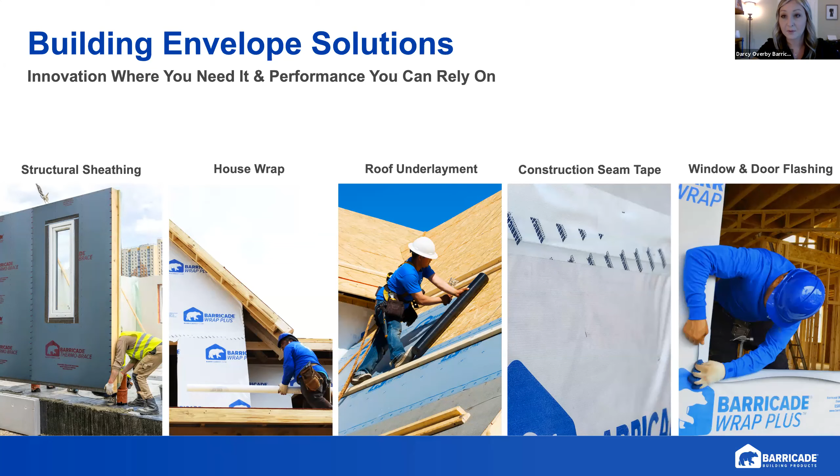So we've got a wide variety of different products that we manufacture. We've got three different structural sheathing options, 4 different house wrap options, a couple roof underlayments, our seam tape, as well as window and door flashing options. So we'll go through first - this is kind of a hot topic right now with the panels market, the OSB market, where it's at today. So we'll start talking about our structural sheathings.

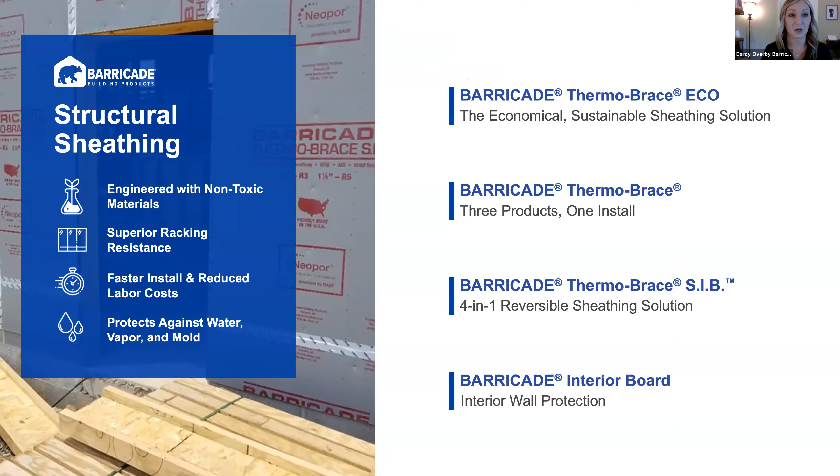So the first product we have here is our ThermoBrace Eco line. This is our structural sheathing option. It is a recycled product. All of the competitive lightweight sheathings on the market are also going to be recycled products. So it's a 3-in-1 product. You've got a structural component, so it takes the place of your OSB and house wrap.

It is a direct substitute for OSB, so it is your structural component. It is coated on both sides with a poly coating, so it takes the place of your house wrap as well. And it is your air barrier. So it is a 3-in-1 product here.

In addition to that, the nail lines are printed on the product, so there's no guesswork as far as where the fastener goes. On the picture there, you can see the different hash lines there. And it's a 16-inch on center panel, made for 16-inch on center, so the hash lines are down the middle as well, so you don't have to guess where the stud is.

We make this in 3 different grades, so green, red, and blue. The main differences here are the green is the thinnest of all the products, and the blue is going to be the thicker of all the products. They have different shear values as well, just because of their thicknesses.

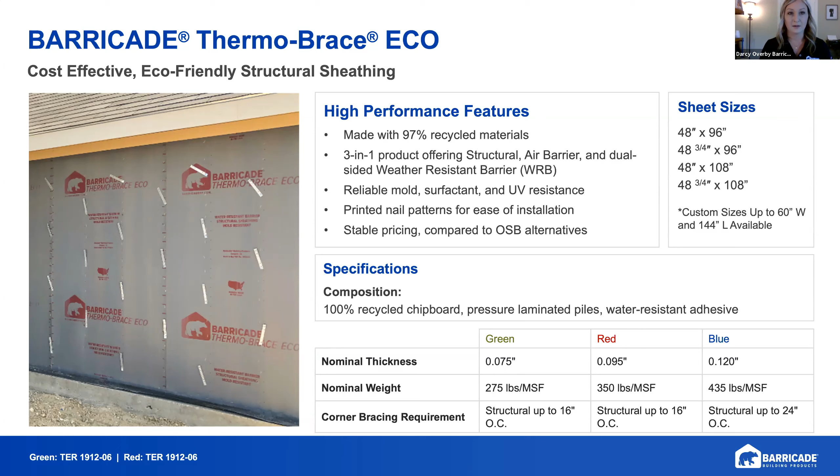Okay, so in comparison to our ThermoBrace Eco, we also make a ThermoBrace. So they serve the exact same purposes, these 2 panels. However, our ThermoBrace is different in that it is not a recycled product. So this is made with virgin kraft fiber material. It allows the product to be a little bit stronger. So you'll end up with higher shear values on all the different grades, green, red, and blue.

So this by far is the strongest lightweight sheathing on the market in comparison to our competitors and in comparison to our ThermoBrace Eco product. If you're going to start taking a look at different alternatives to OSB or other sheathings, and you want to look at lightweight sheathing, this product here will be your strongest option.

Again, it is not following the OSB market, so the price is very stable on the product. We've had 1 price increase in 2-3 years, so it's very price stable. And I think a lot of you were asking yesterday, how does it compare price-wise to OSB? And right now, it's less than half the cost if you compare panel for panel. So it's getting the job done.

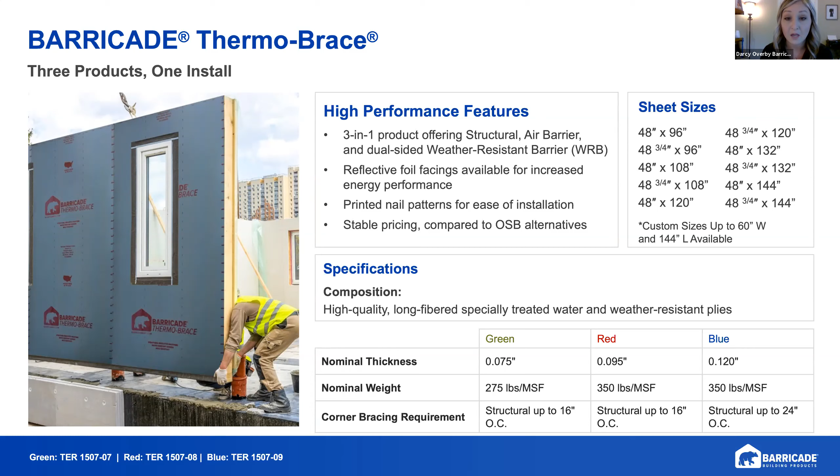So the other sheathing option we have is our ThermoBrace SIB board - a structural insulated board. This is the exact same thing as far as it's using our ThermoBrace structural panels, but we are adding a Neopor foam to one side, giving you an added R value. So you can now have a structural panel with an R3 or an R5 value to it, and your air barrier and your weather barrier all in one.

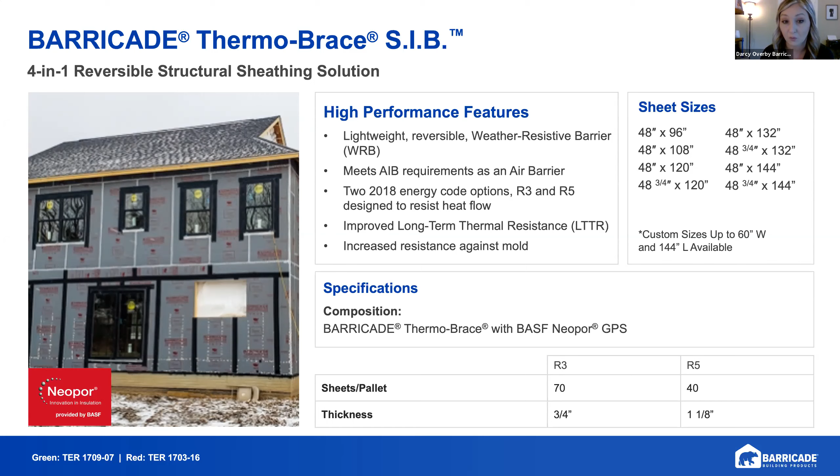The neat thing about this is that it is reversible. The other products on the market are not reversible products. Yeah, so obviously one of those advantages is the fact that it can be reversible. So you can go structural sheathing on the outside, similar to the very popular zip wall system. It would be the only two products that have the hardboard on the outside and the foam on the inside.

That leads to the ability to nail it, as opposed to if you go foam on the outside, you're using a crown staple, typically a 15/16 crown with a 1.25 leg, where you can use a standard nail gun and hit it with an 11 gauge roofing nail, with the hardboard on the outside. Taping the seams, or you can house wrap, either one - it doesn't matter, but it's a pretty clean install. Lightweight, easy to move. You're not having three guys offload lumber, you're having one guy grab a sheet, put it on the wall, and then continue on.

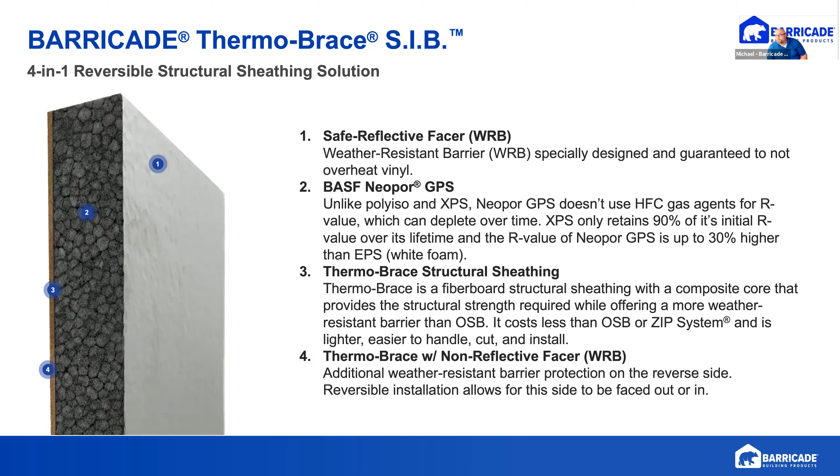Then the last item we have here, this is our interior board. Basically this is used for if you're doing anything on the interior side of the home on the stud. This has poly coating in between the plies here, so it helps reduce drywall cracking. It is gluable if you're doing anything that needs to be glued as far as the interior board.

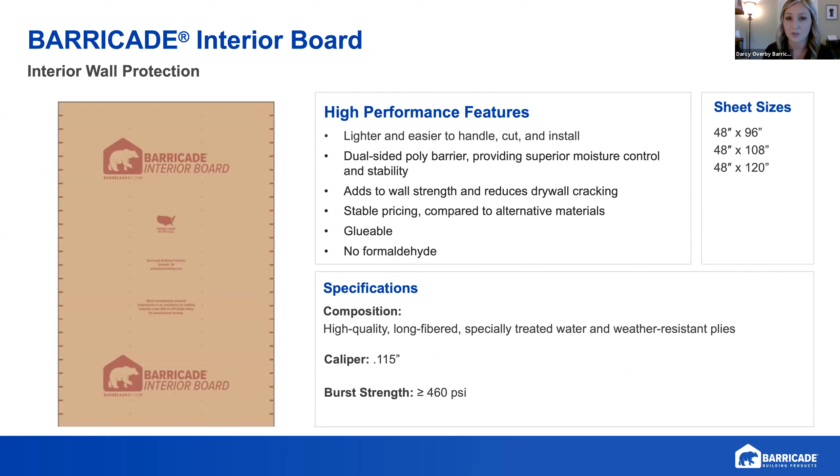So when you're talking about the different sheathing options that are available, and the lightweight sheathing is newer to the market, the first thing people start looking at is the cost and availability of the product. This product doesn't follow any commodity market, so when compared to OSB or CDX, we're very stable. You don't have to quarterly or bi-weekly worry about the product having dips or spikes at all - you can really plan around the cost of the product.

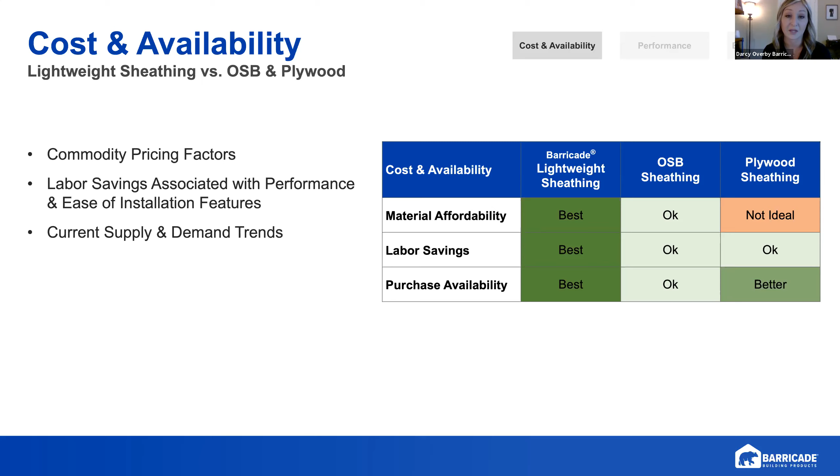As far as performance goes, really the big thing here is people get stuck on the thickness of the product. At most, it's 1/8 of an inch thick, that's right around how thick it is. Going from 7/16 OSB to 1/8 of an inch thick, people really have a concern. Really the fastening of the product is where a lot of our strength comes from. So like OSB, you will fasten 6 and 12 - 6 inches down the edges and every 12 inches in the center. Our product is 3 and 3, so you're fastening it a lot more often, which allows a lot more shear value.

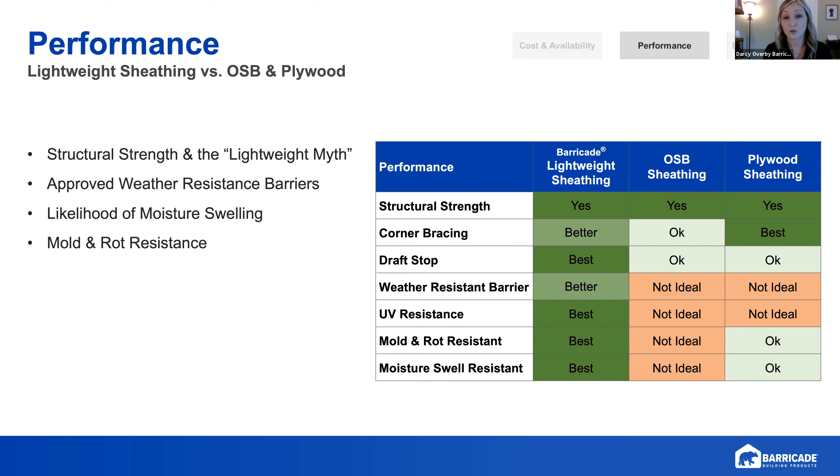And then ease of installation - how is it different to install than OSB? Are my guys going to know how? Those are some of the questions we get asked. And it's a direct OSB replacement, so you put it up just like you would OSB, but we've got the nail lines on there as well, so there's no second guessing where do my nails go - you're not going to miss it because it's all right on there. As far as fasteners, you can use your 1¼ coil roofing nail or a 1-inch 16 gauge staple with a 1¼ leg. So there's not a lot of differences between this and installing OSB.

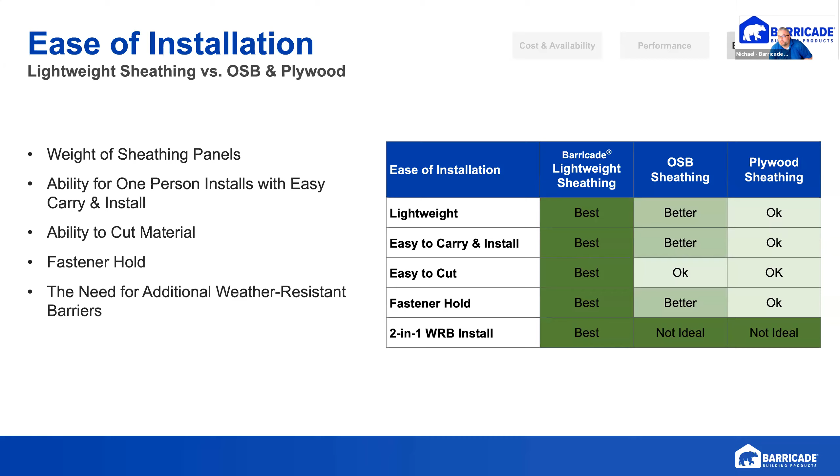Ease of installation spreads the whole way through, whether you're using siding or Hardie or anything like that. Your nail lines, so you're going to know where you hit the studs. That's a big advantage, especially if you want to have siding installed properly - hitting your studs is a big factor in that.

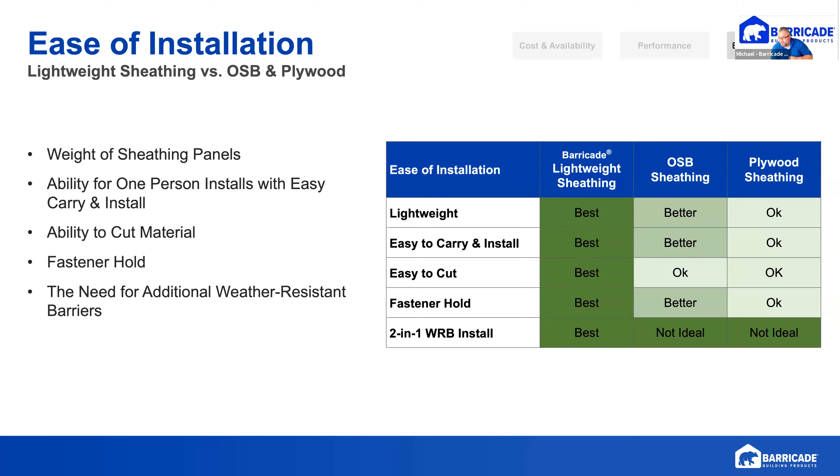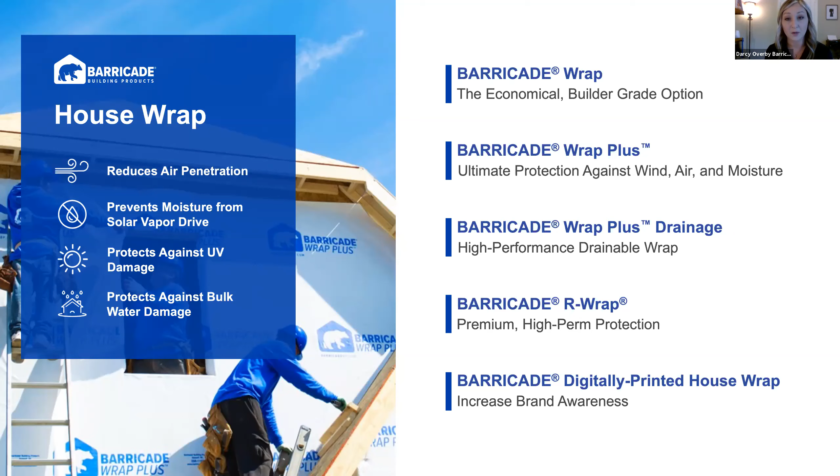So that was our few different sheathing options. We also manufacture a few different house wraps. We've got a builder grade, economical woven wrap, a couple of different options - we've got a high perm and a low perm option, and a drain wrap that we'll go through here.

So our first option is our builder grade option. This is going to be your woven perforated option. It is up to 12-month UV protected, and we can do multiple different sizes as you see there. This will be at 11 perms, and it is translucent, which is unique to us. So when you put it up, you can see through to the stud.

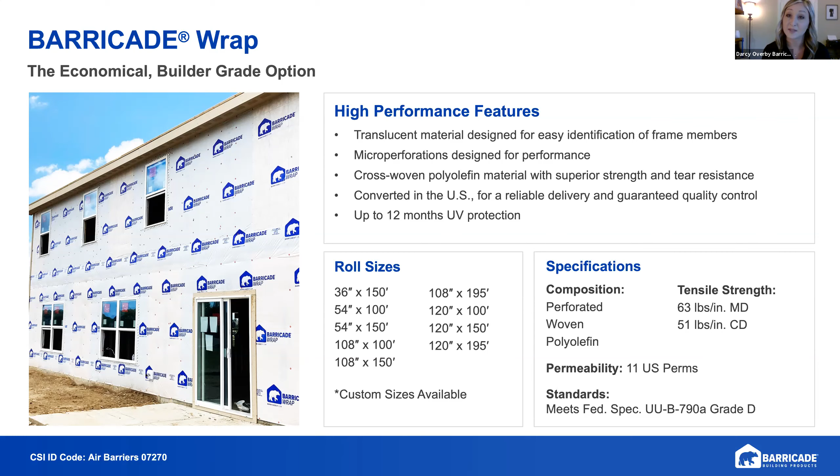We also have our Barricade Wrap Plus. This is going to be a Tyvek or Typar equivalent. This is a low perm, non-woven, non-perforated option that has up to 9-month UV protection here. So this is going to be at 16 perms.

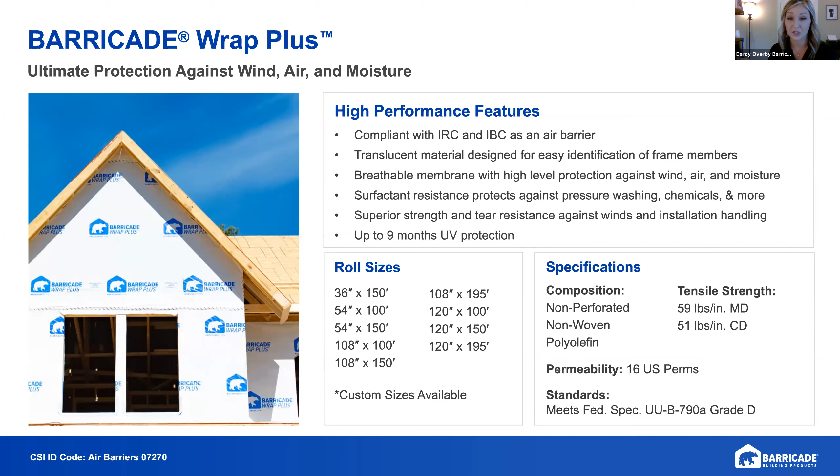And then we also have our drainage wrap. This is newer, again translucent. It is surfactant resistant, but this has a three-dimensional aspect to it where the actual ovals on the product bubble up. So it allows for more drainage, bulk water drainage down the product. It allows somewhere for it to go. Non-perforated, non-woven, and this one is 18 perms.

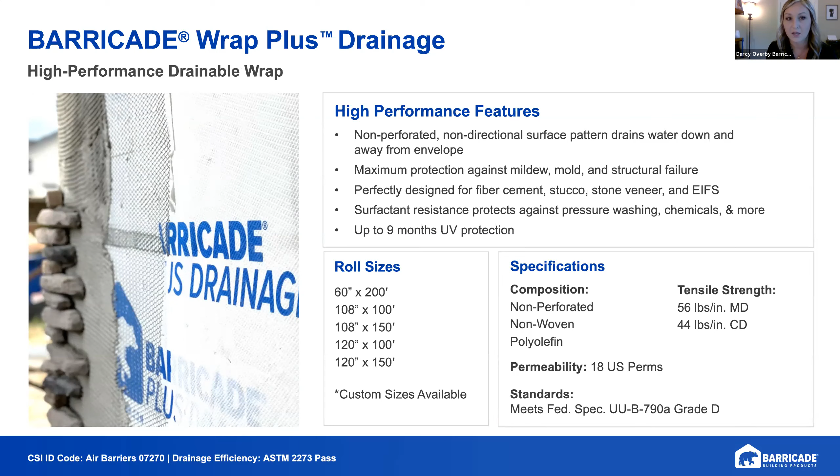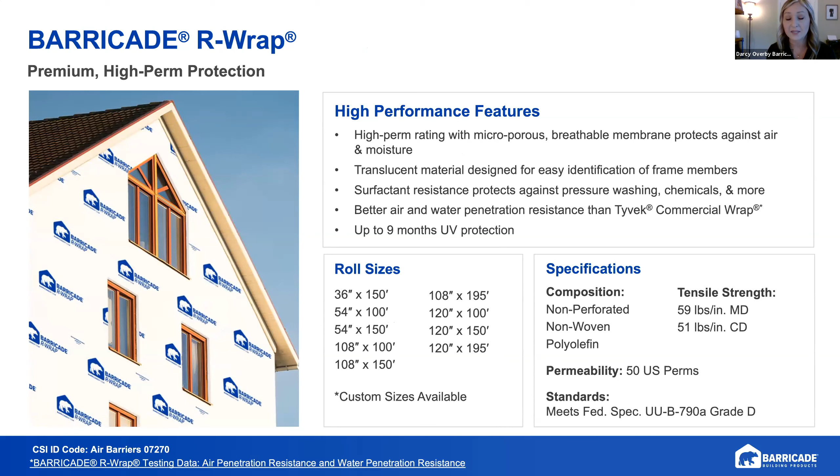And then our R-wrap, again non-perforated, non-woven, but this is our high permeability product. So this is 50 perms, and this has up to 9-month UV protection. So again, it's really just the builder's perspective - do they want a low perm option? Do they want a high perm option? We have both.

And with all of our house wrap options, we also have the digital print capability. So we can not only have your logo and your phone number, website running down the center of the roll, but we could alternate. We could put your customer's logo if you're doing multifamily work. We could put anything you want down the middle of the roll. And if you use our standard layout, which is your logo alternating with the website phone number, there's no upcharge.

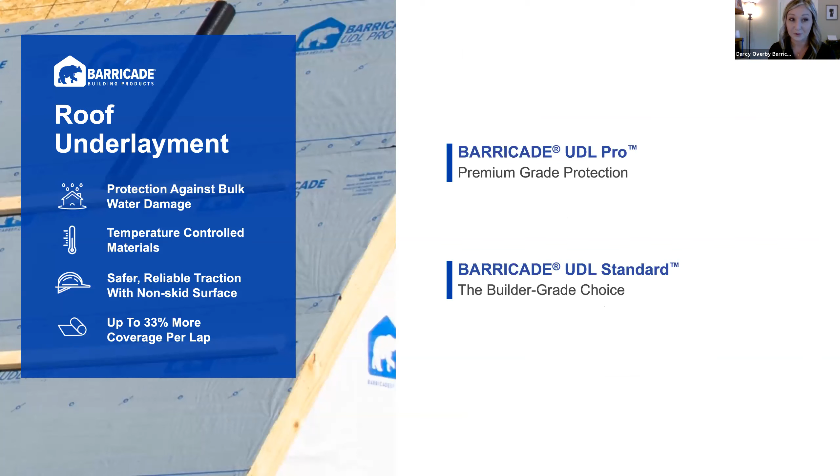Okay, so that was quick on our house wraps there. And we also have a few different roof underlayments. So we've got our UDL Pro and our UDL Standard.

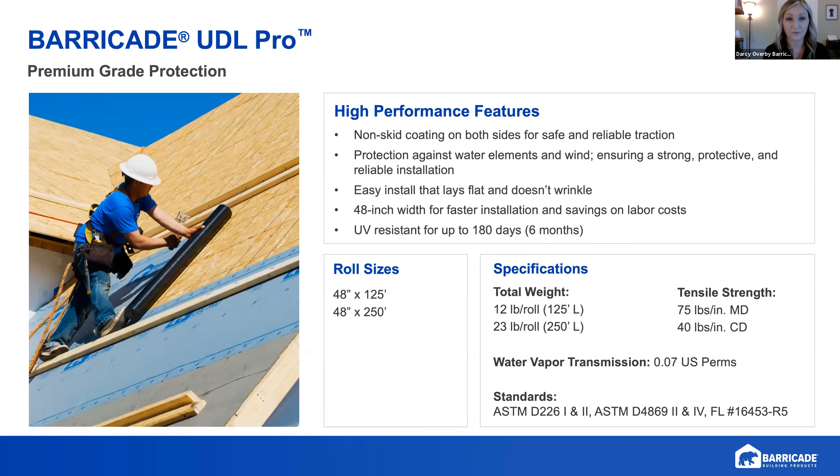So they're very similar in that they're both gray in color. This allows a lot of the contractors to like the gray because it doesn't get so hot, doesn't heat up on the roof. We've got our UDL Pro - this is going to be our premium grade. This will be gray on the front, and then it's actually black on the back for extra non-skid protection. This is UV resistant up to 180 days. And then we've got two different sizes there - we've got 125-foot rolls or 250-foot rolls.

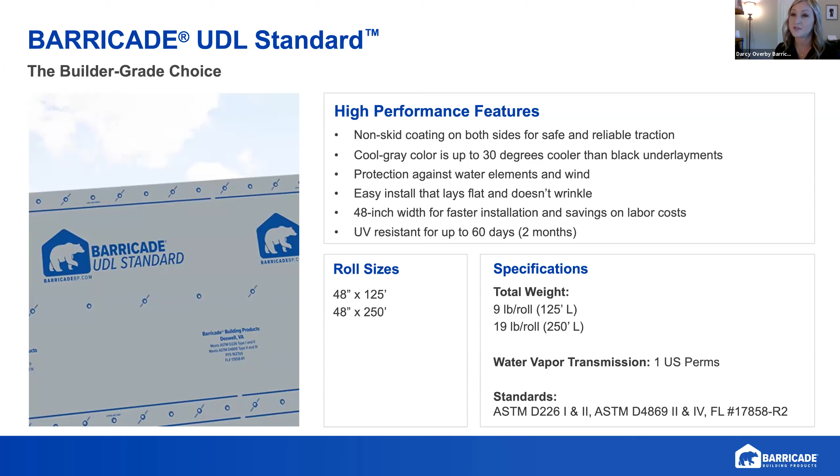Then this is our standard. So this is going to be our more economical choice. And the difference is this is still coated two sides, but not with the extra black backer. So this will be gray on both sides, still non-skid on both sides. And then the difference on this one, it'll be UV resistant up to 60 days. These are great alternatives to 15, 30-pound felt. That's right.

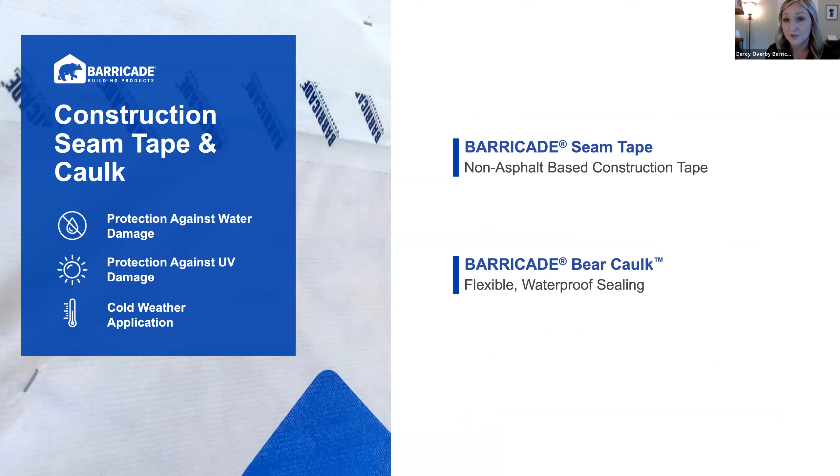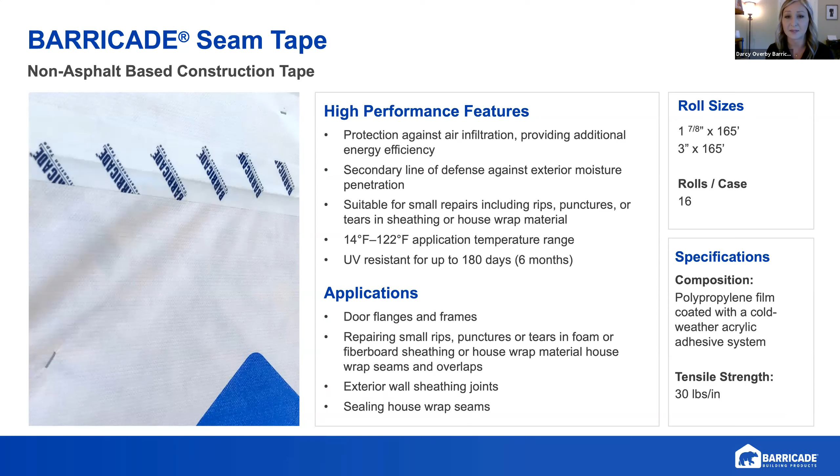Then, if you need, as far as seam tape and caulking, we also have that. So we've got our Barricade seam tape. This will be used if you have seams in your house wrap, or if you're using our sheathing and you're not overlapping the panels, you're butting them up - we make a seam tape to help cover the seams. And then we also have a Barricade bear caulk for around windows and doors.

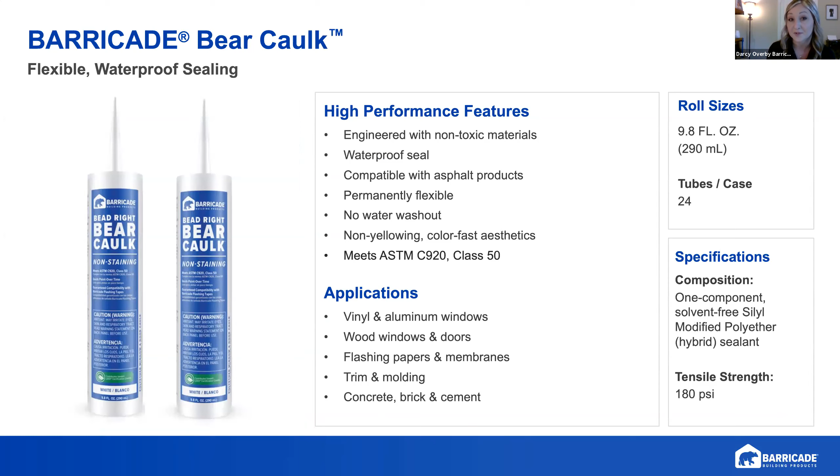And then to round out our offering, we also have multiple different window and door flashing tapes. And again, we've got all the different options as far as how you, the builder, are building. So we're going to have an asphalt product, we're going to have a butyl product, we're going to have an extreme, which is a little bit different - it's an acrylic product. So depending on maybe the price point or maybe the temperature, we've got really an option for everything.

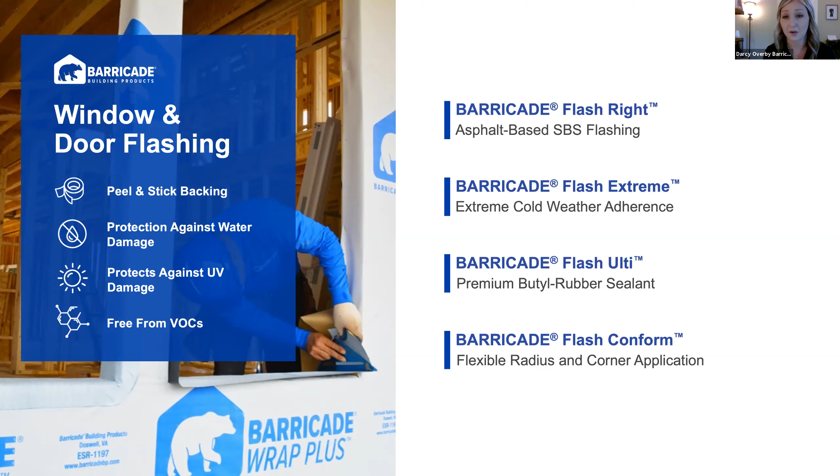So the first one is our Flash Right. This is our asphalt-based flashing. So this one you can apply in temperatures from 40 to 160 degrees. It's UV resistant up to 180 days.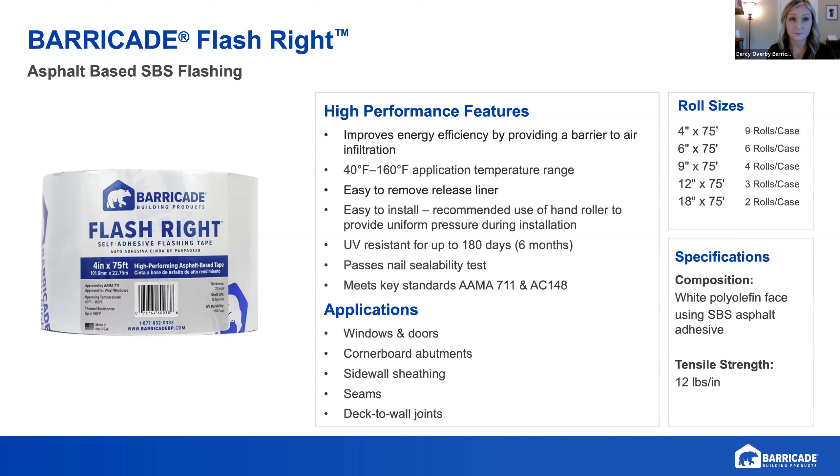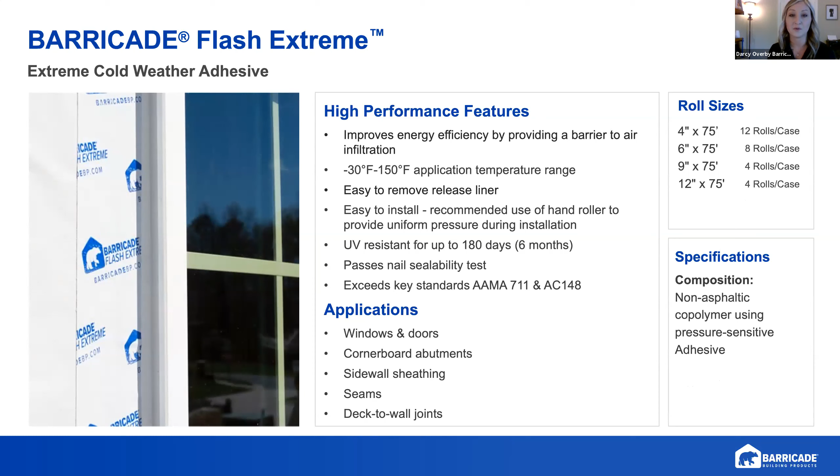Our Extreme is a great option. You can apply it in temperatures from negative 30 to 150 degrees. It has an easy-to-remove release liner and is UV resistant up to 180 days. This product is probably one of the best in the market. It doesn't lose its tack pretty much ever, so if you go to a job and it's pulling in a corner, which you see a lot with asphalt or butyl, the Extreme product will still have tack. You can get up there and roll it out or push it tight in your hands. The best thing is to either roll it out or take a wooden block and smooth it out. That will not lose adhesion at all.

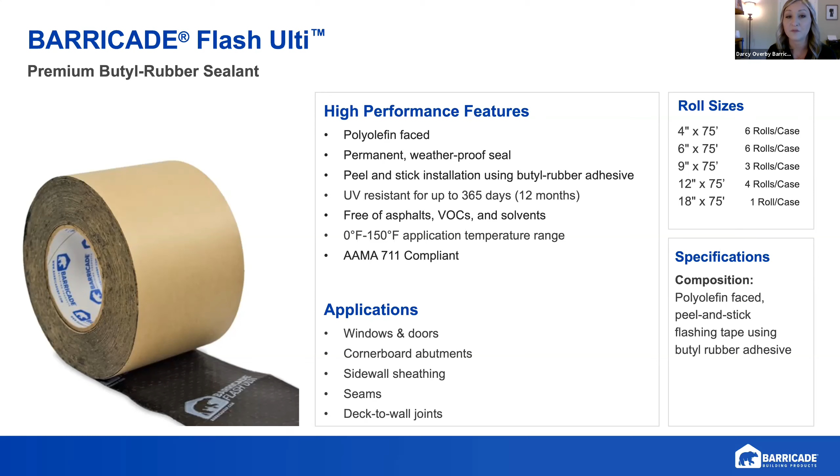Our other option is our Ulti-Flash, which is our butyl-backed option. This one is UV resistant up to 365 days and has an application temperature of 0 to 150 degrees. And then, for around radius windows or windowsills, we've got our Conform, our stretchable flashing. This is made with a butyl backing, like our Ulti-Flash, just in a stretchable application. It has a 40 to 180 degree temperature range, and it's also UV resistant for up to 365 days.

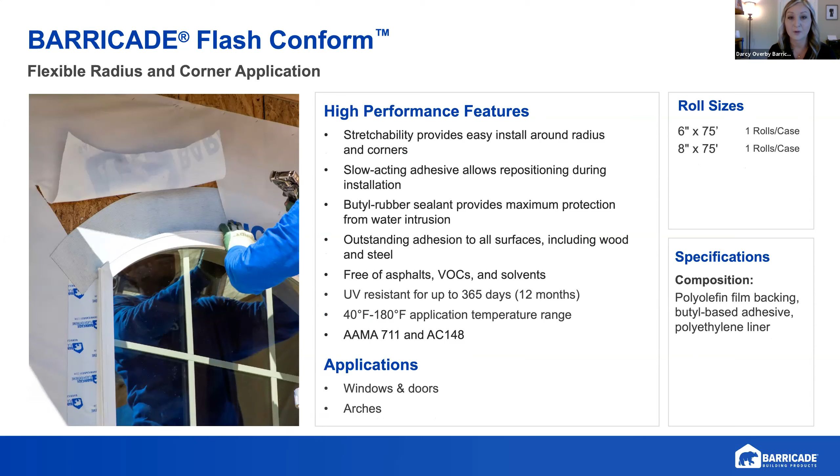Great. So with that, Barricade, again, we are located in Doswell, Virginia. We've been around since 1986. We were one of the early manufacturers to the market to make house wrap and a lot of these different products, and we really offer the complete exterior building envelope. So with that, we are open to questions. Thank you very much for listening.

Will Pippin here, I have a question. As you go through your presentation, we're looking at a lot of the specs and how this stuff is applied. I guess the reason why we haven't used Barricade is because it's maybe not spec'd on the plans. If I take an apartment building plan and say we want to use Barricade product, is it an exact substitute for, let's say, a Tyvek package that we have now? In other words, we could get a price to use Barricade products and make sure they work. We're not having to redesign anything, we're just able to substitute in a Barricade product.

That's right, yes you can. Our products perform as well as Tyvek. And frankly, you will see a cost savings going from a Tyvek product to Barricade, but you're getting the performance that you would expect.